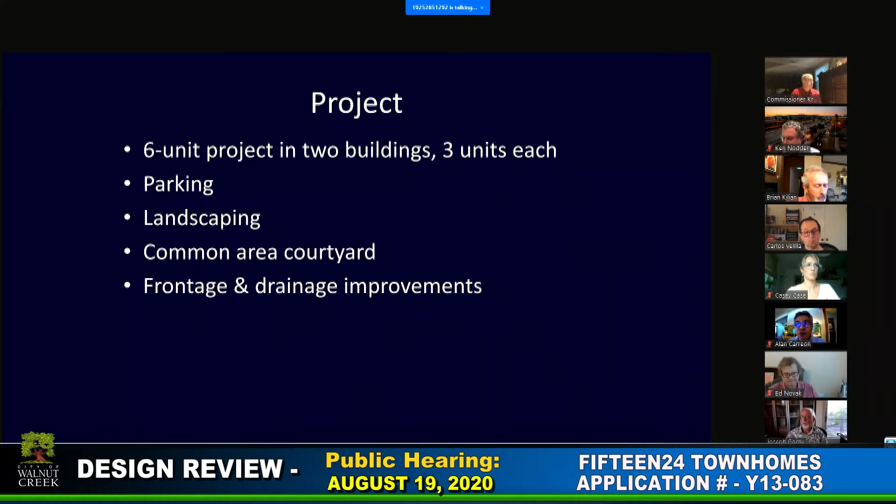The project is 6 units in 2 buildings. The project includes required parking, landscaping, common area courtyard, as well as private open space areas for each unit. The project also includes frontage improvements along Oakland Boulevard and Almond Avenue.

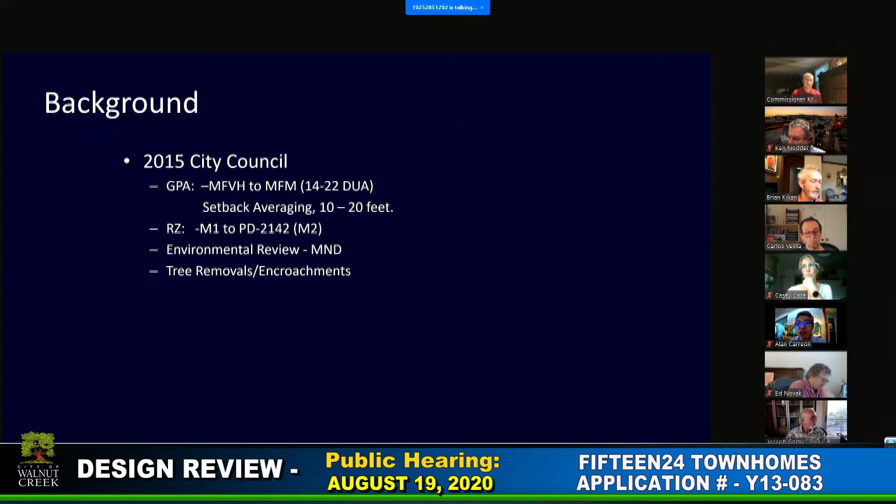For a little background on the project, in 2015, the City Council reviewed the project, and it had gone through Design Review Commission and Planning Commission. The applicant was granted a general plan amendment to reduce the density. The minimum density was 9 units with a height limit of 50 feet. After review of the concept by the DRC and Planning Commission, the applicant and the commission felt that what was proposed wasn't appropriate, and thus they went back basically to the drawing board with a smaller project, which the DRC, Planning Commission, and City Council endorsed.

Part of that 2015 City Council action was the rezoning. It went from M1 to a planned development. The City Council reviewed the architectural plans and proposed development plan, and approved that through a PD zoning.

The project also had an environmental review, and a mitigated negative declaration was adopted by the City Council. City Council also approved a tree removal permit and tree drip line encroachment permit. In 2016, the Design Review Commission approved the project, and in 2017 was granted the first approval of a tentative map for condominiums for the property.

Since that Design Review Commission approval in 2016, the Design Review Commission adopted 2018 Objective Design Standards as a supplement to the Walnut Creek Design Review Guidelines. And in 2019, the City Council adopted the West Downtown Specific Plan.

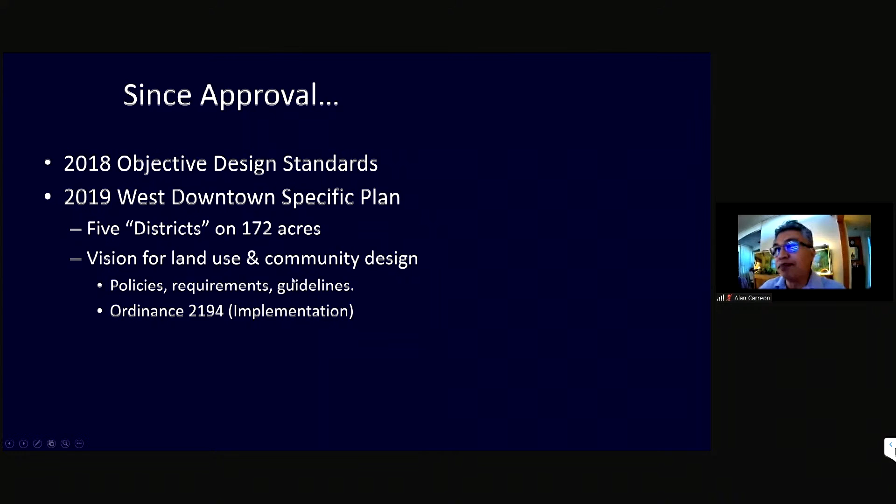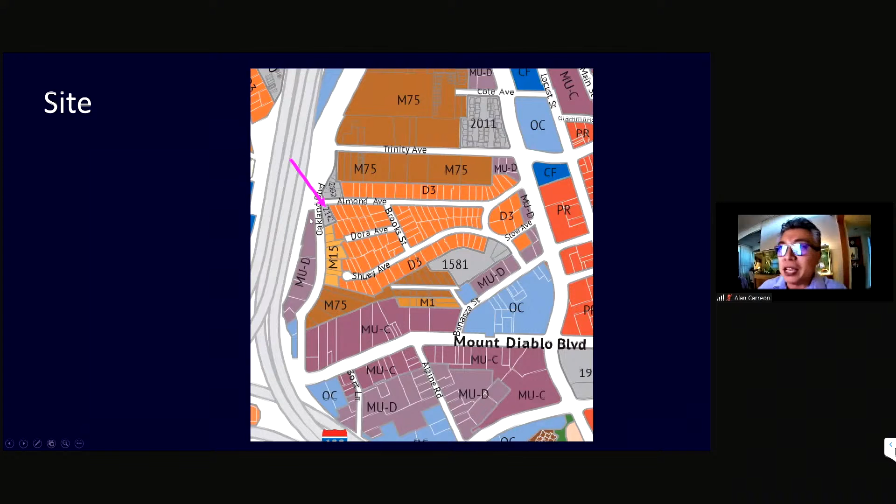The site is located here at the corner of Almond Avenue and Oakland Boulevard, about 12,200 square feet. As we can see, the property abuts D3, or duplex zone, properties, along with multifamily along Oakland Boulevard. Across to the north is the single-family development known as Almond Station. And across the way, what was zoned office is now mixed-use downtown. Take a look at an aerial.

This is the property as of 2020. The applicant has demolished the units that were on site, there were two of them, 1524 and 1526. As indicated in my staff report, this property has a PG&E line going over it, and the proposed building 1 on the north side of the site is placed at the outer extent of what's called the drop clear zone, or drop zone, from that power line.

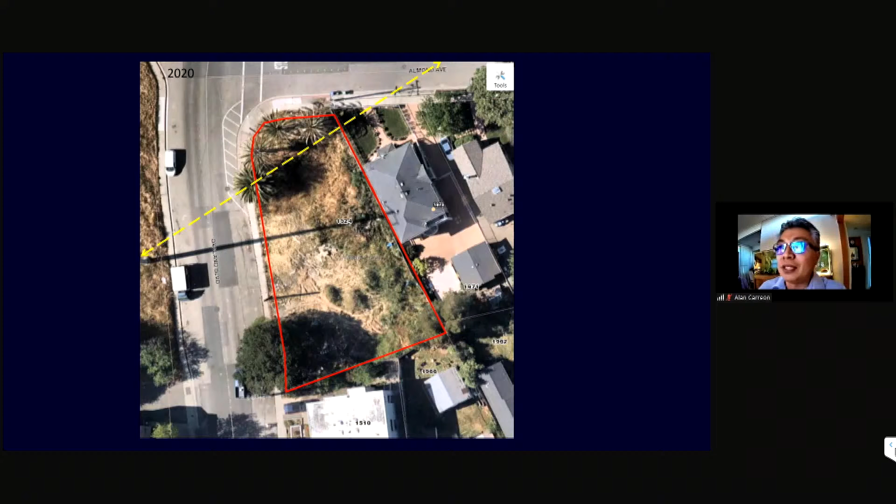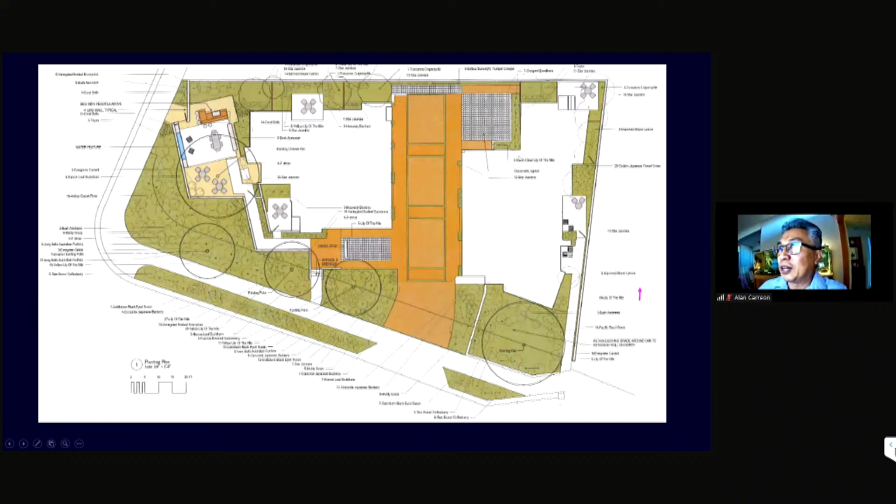This is the currently proposed plan seeking reapproval. You can see building 1, building 2. The common courtyard has been expanded in area, and the paths have been adjusted and enhanced to be more interesting than what was previously proposed. The entrance to this unit is in the same location, same with this unit here.

Part of the West Downtown Specific Plan requires that development along Oakland Boulevard face the street. The architect has adjusted the elevation and the plan for this unit in building 2 to where the front door is now accessed from and visible from Oakland Boulevard. The center unit would still be accessed through this private patio. And here's that entrance to the eastern unit of building 2. You can also see the improvements along Oakland Boulevard and Almond Avenue.

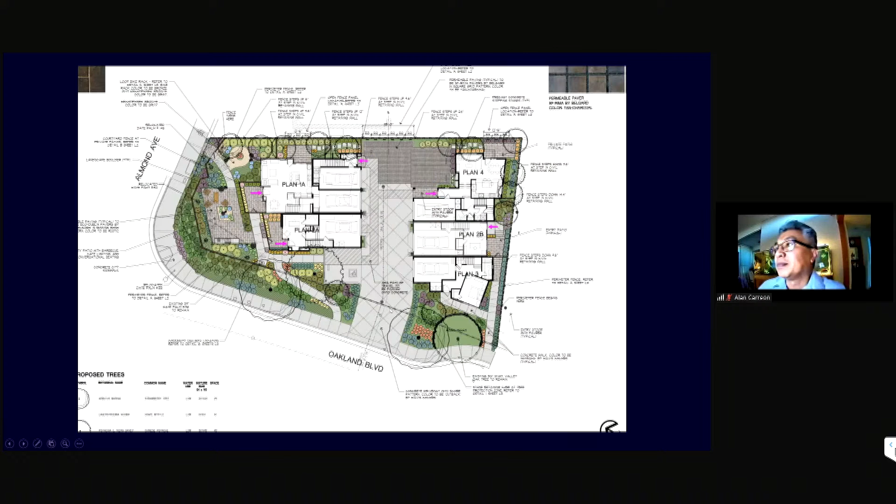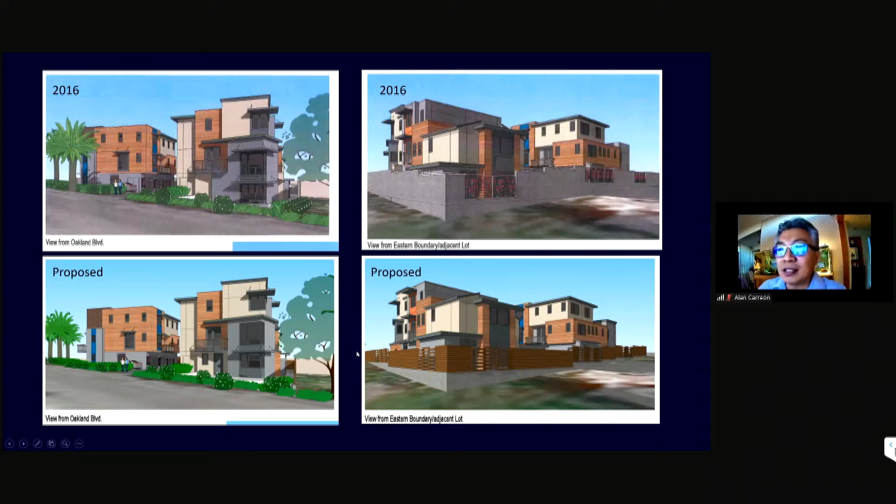So this is the proposed, and here's that portion of wall adjoining the parking stall that could use a little bit of detail. That's building 1, with the relocated electrical.

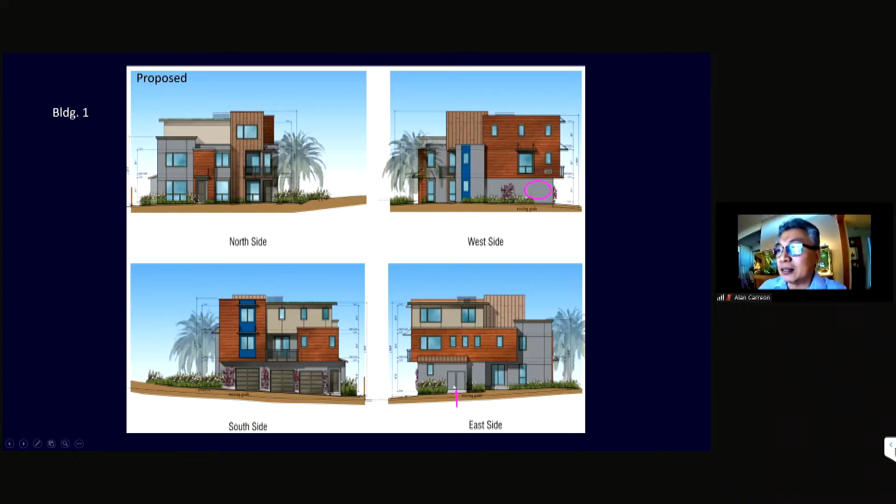And building 2 - actually, the architect has gone ahead and moved that panel from the west side of building 2 to the east unit.

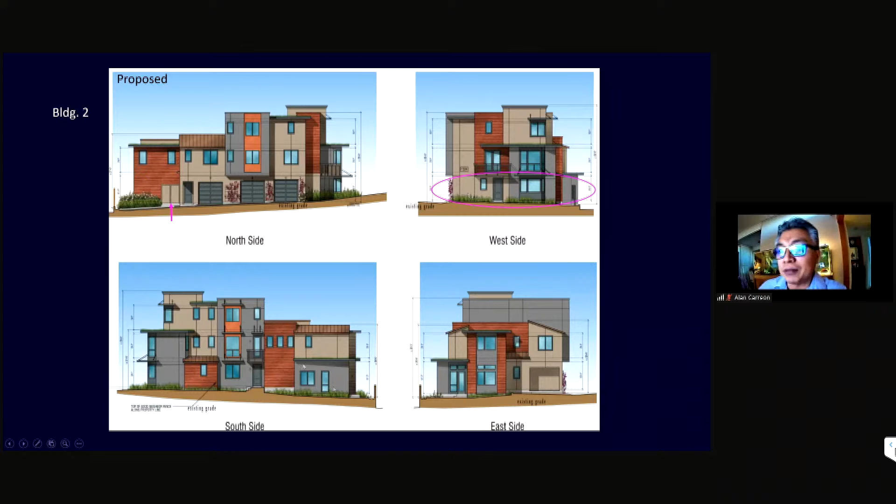There's the elevation of the wall system and fence system in comparison to what was originally approved. And moving on.

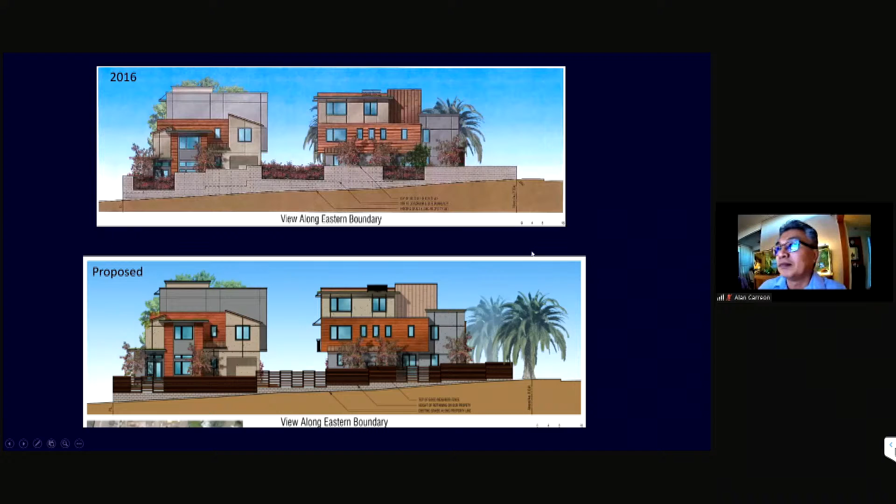My understanding is that the architect and owners have been in contact with Mr. Chalice, and I believe they will be reporting on the outcome of that discussion this evening.

Otherwise, the fence around the courtyard is also proposed as horizontal slats, about 4 feet tall. This fence would actually be lower than the sidewalk elevation, so it still does provide some modicum of privacy.

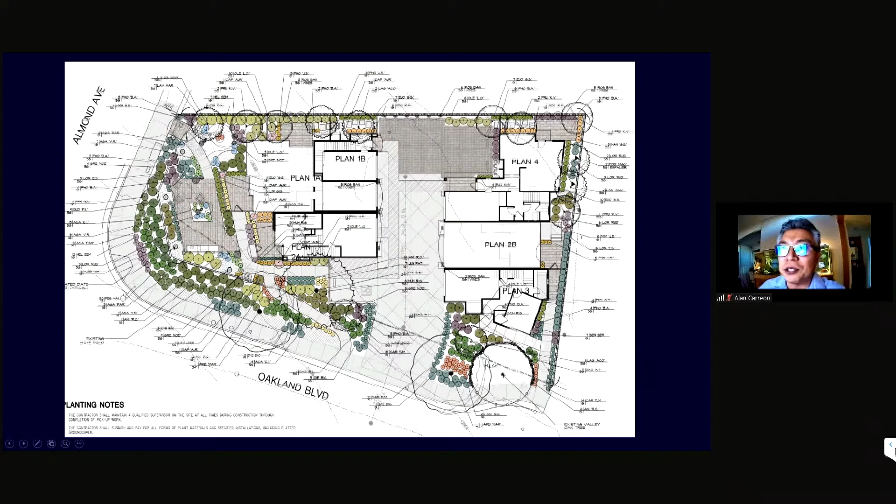Staff's not opposed to the horizontal fence system along here, in that the visual permeability probably helps this area. And these are some of the palms that were transplanted, shown on the aerial image earlier.

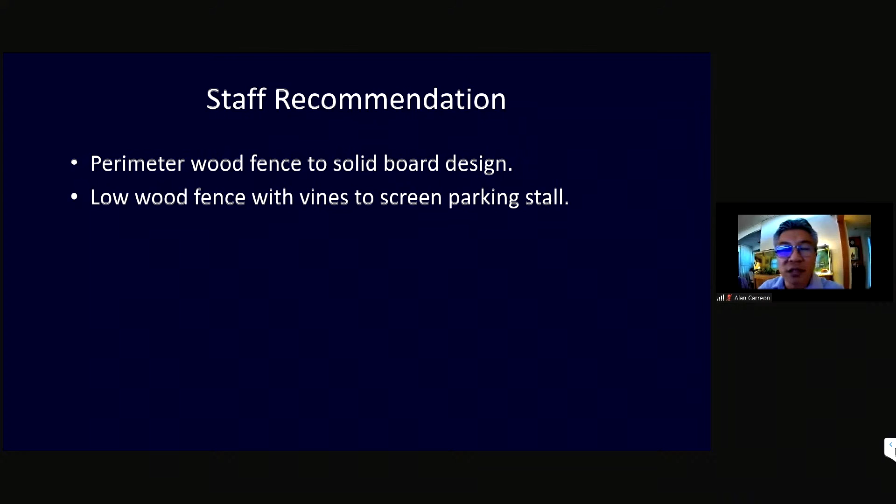Staff's recommendations: for the perimeter wood fence to change to a solid board design; a low wood fence with vines to screen that parking stall as indicated in the staff report; design treatment of the west elevation of building 1; and again, discussion about bicycle racks, delegating that to staff for review and approval through the site development permit.

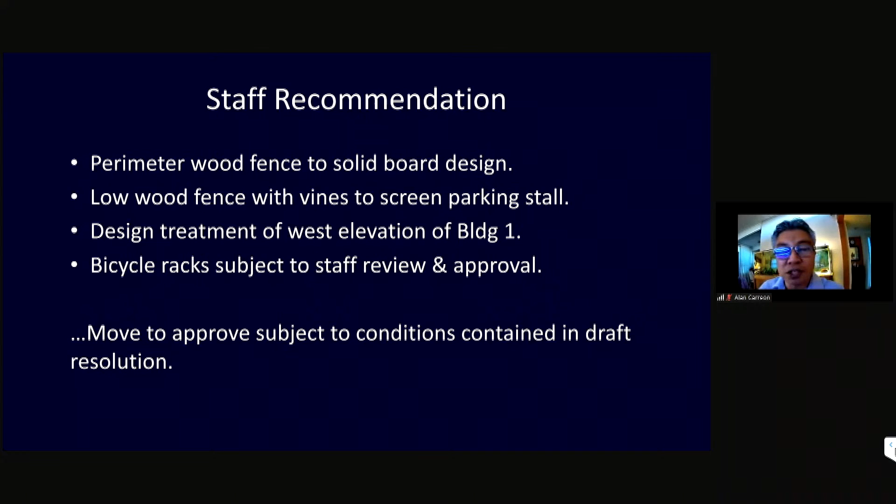And with that, staff's recommending to move to approve the project subject to the conditions in the draft resolution. And I'm standing by for any questions or comments. Thank you.

All right, thanks, Alan. Do we have any questions for staff? I have a question. Casey? Yeah, does there need to be stormwater treatment on this site?

There does. The plan is to convey and collect to a drainage system. They're not required per se to have a basin. That's one of the difficulties of this project site. The storm drain on Oakland Boulevard, I believe, is like 300 or 400 feet down the street. In order to get flow from the southeast corner to Oakland Boulevard, the drainage inlet is like 13 or 14 feet deep. Okay. Thank you.

Right, any other questions of staff? Alan, I have a question for you. In your analysis, you indicated that there is consideration of the front setbacks, that there was a 6-foot sidewalk and a landscape strip between the curb and the sidewalk. I saw that on the original plan, and it seems to have disappeared on the new plan. That's correct. The plans were revised through the engineering review, and what is proposed is what is being accepted by engineering.

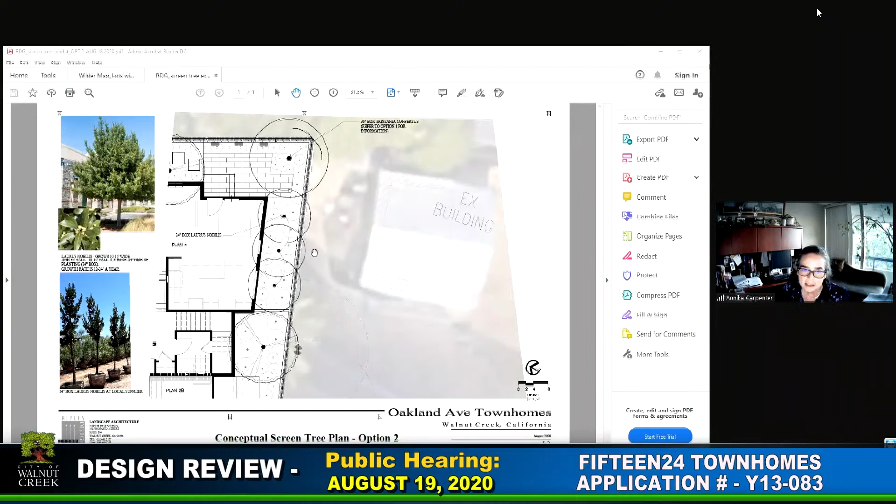Okay, can we see that, everybody? So we are showing his building, the small building on his property that he was concerned about. It's on the corner, so we're very tight on space, with only about 6.5 feet between the building and the retaining wall. I had to come up with trees that would be very forgiving, could grow close to the architecture without interfering with it, but get tall enough and stay evergreen to help mitigate the bulk and mass of the building as seen from his house in that yard.

So I came up with putting three 24-inch box size Laurus nobilis trees, and I have an image of what a 24-inch box looks like at the time of planting at the nursery. They're 10 to 11 feet tall with a 2 to 3 foot wide head on them. And then there's a picture of a more mature tree so he could see the growth.

On the corner, instead of the purple-leaf plum, since he wanted evergreen, we had all deciduous trees, and the crepe myrtles we had were the very small Acoma crepe myrtles, so they weren't going to get very tall no matter what. This is a 2-story building, so we wanted to get some trees in here to help mitigate that.

So on the corner we upsized to a 36-inch box and decided to do a Brisbane box tree, so we get the evergreen and a very quick growth rate, and it will help mitigate the building against his property. This was the option he preferred. So right now, this is what we would like to proceed with, unless he has further comments or suggestions we could work out with him.

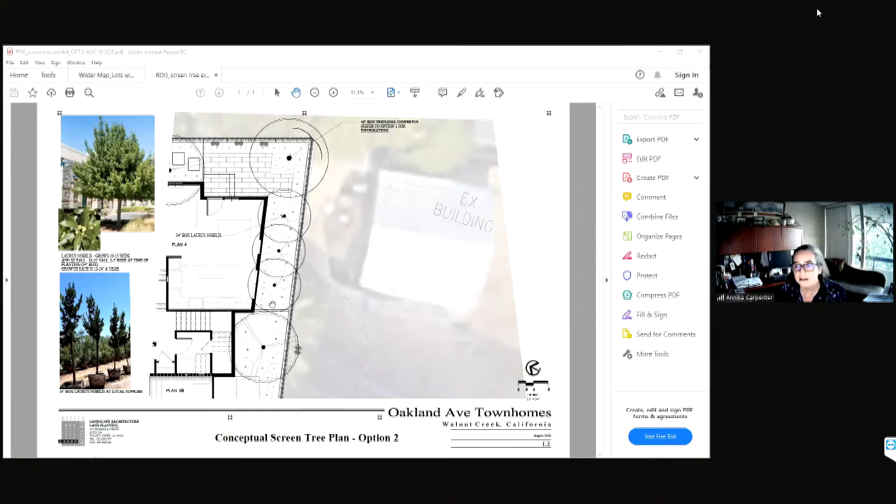Is that your presentation, or do you have other people or items to present? That is our presentation at this time. We do have other people here available for answering questions if necessary.

Okay, great. All right, let's open it up for questions from the commission at this point. Does anybody have questions of the applicant? I have one.

I was wondering about that sign, the 1524 sign on building 1. It doesn't show up in the 3D drawings, but it's in the renderings. Is it required to be a certain height off the ground by rule, or could you drop it down so it was in the stucco wall instead of the wood wall, as part of animating that wall down below?

No, to my knowledge it doesn't have to be that high. Originally there were meter closet doors on that wall, so the sign was placed at the lower corner of the upper floor in that original design. I am totally open to working with staff on resolving design articulation along that wall, and if that's something staff would consider, I'd be happy to move the number down.

Okay, thank you. Any other questions? I have a question: what's the function of the decomposed granite area close to Almond Avenue? It has like a little loop and a plant in the middle.

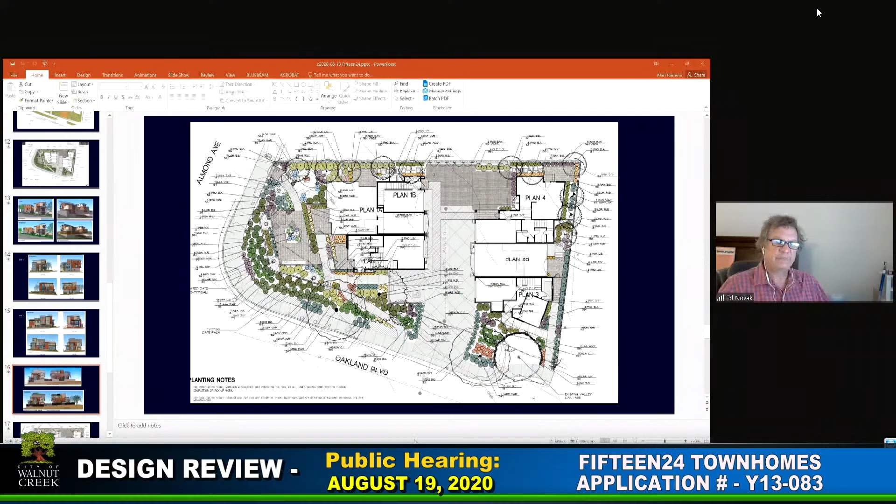I would be open to looking at these opaque areas and leaving it as horizontal, and the open areas that are in question, go with the board on board. And maybe we can work out the pattern a little bit more so there's a consistency or repetition to it, kind of alternating that.

Okay, staying with the fence detail on L2, I'm just kind of curious about two things that struck me. Number one, if you have the horizontal cedar wood staying, that seems to be a sophisticated fence, but yet you're using pressure treated posts. That would seem a little bit awkward with unrefined posts. So any consideration for changing those posts to make it equal to the boarding?

And then along with that, you have 8 feet, and I don't know with your 1-bys spanning 8 feet, I suspect after 6 months in the sun and rain, those things are not going to be as crisp and straight as your drawings indicate. So is there a better spacing on those posts we could come up with to make sure your vision stays that way?

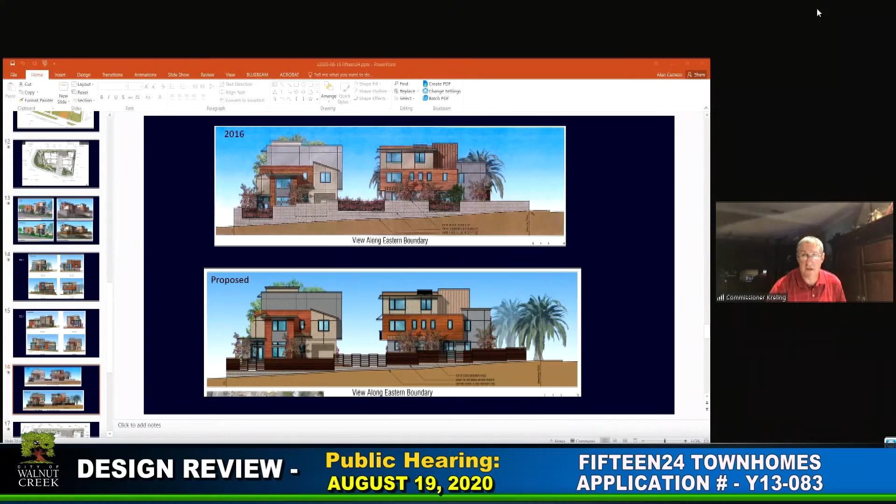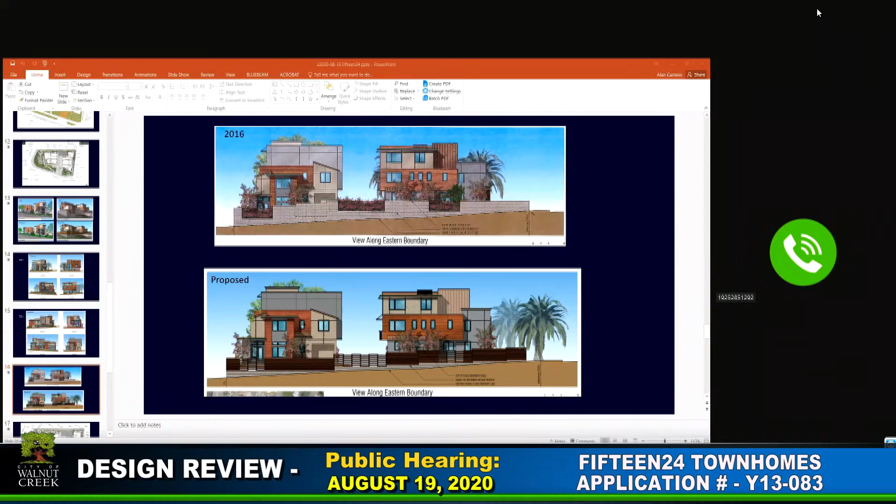Okay, any other questions? Charles, what in particular was the design guideline you were discussing just now? For this project, the objective design standards serve as guidelines for the project. One of the guidelines is for a secured, lockable bike rack. Got it, okay, thank you.

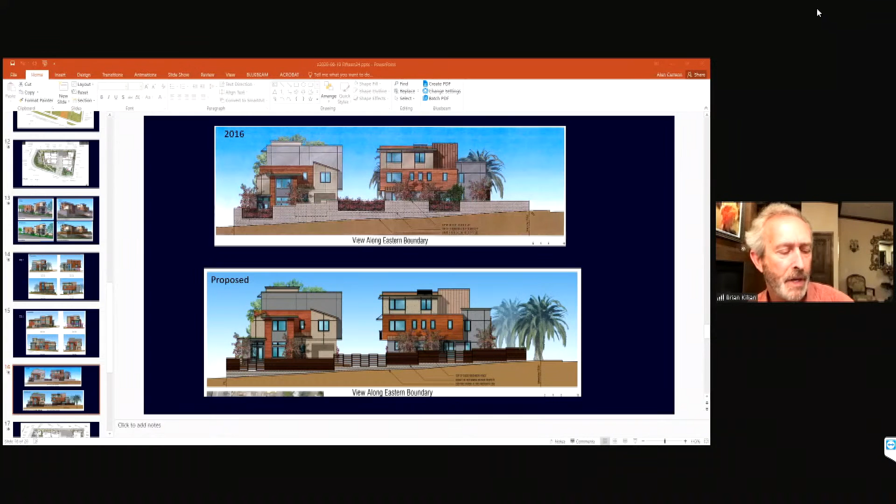All right, Mr. Chair, we'll wait a few seconds for the delay on that. And then maybe while we're waiting, Alan or Ryan, can you confirm that there's no parking along Oakland Boulevard up to the corner there? Mr. Novak is correct. The available parking stall would be near that oak tree or at the property line. The remainder of the frontage for this project along Oakland would be red curbed.

Nobody? Okay, so we're not getting anybody wanting to chime in from the public on this? Seeing none, I'm going to close the public hearing and we'll bring it back to the commission for comments, unless the applicant has anything to jog your memory, a little last thought before we go to comments. I think we're good, thank you.

Okay, all right, well let's go to comments then. Does anybody like to start? Sure, this is Charles. Since I didn't have questions, I'll just share my comments. Overall, I think this is a great development.